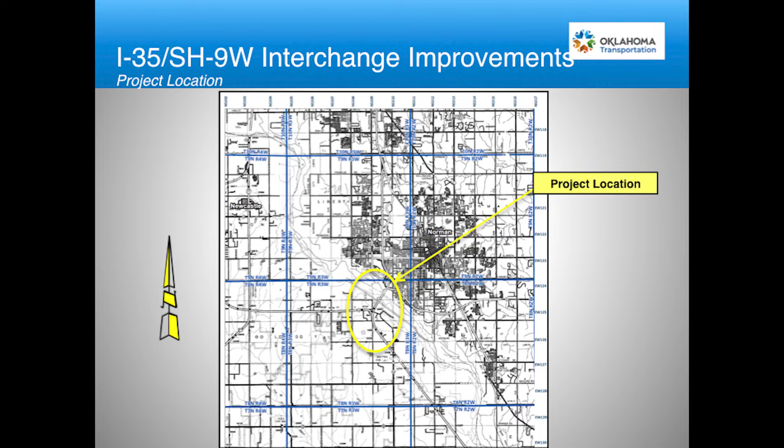Our existing State Highway 9 project goes over I-35, which has 4 lanes currently through on the north side of the State Highway 9 bridge. Our typical section consists of a 30-foot wide paved median with concrete barrier, 10-foot inside and outside shoulders to supplement those 4 lanes of travelway. A little further north towards the bridge, there are additional lanes that come into play, which we will utilize in all of the design alternatives we're going to show this evening.

South of the State Highway 9 bridge, our typical section changes a little in that we have a 30-foot wide grass median with cable barrier, a 4-foot inside shoulder, and a 10-foot outside shoulder.

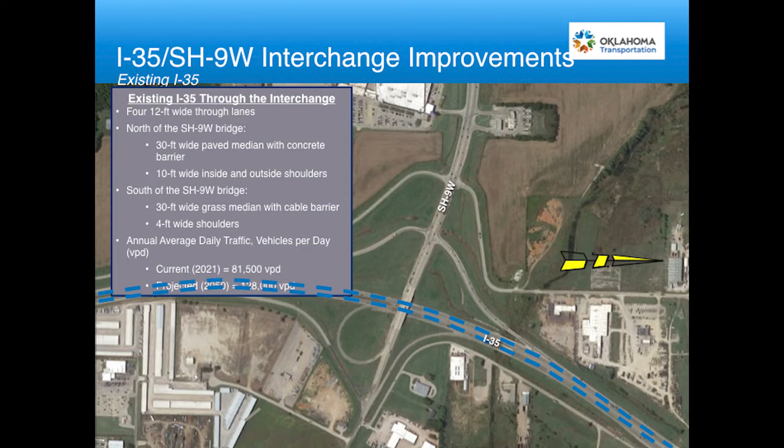The average daily traffic through this area on I-35 currently is about 81,500 vehicles, and we're projecting that to go up to about 128,000 vehicles a day.

On State Highway 9, currently we have 4 lanes of travelway on an 80-foot wide bridge. We've incorporated a few turn lanes, left turn bays, and some right turn lanes. It also has two 10-foot wide shoulders on both sides. Current traffic on State Highway 9 over I-35 is 34,690 vehicles per day, and we're projecting that to accelerate to 58,900 vehicles a day by 2050.

Our existing interchange as it sits today is a partial cloverleaf. On the west of I-35, we have diamond ramps with southbound travelway exiting to State Highway 9, and State Highway 9 traffic entering onto southbound I-35. In the southeast quadrant, we have a loop that goes eastbound to northbound I-35, and a northbound exit ramp that exits to State Highway 9, where you can go east or west. In the northeast quadrant, we have free flow for westbound traffic traveling on State Highway 9 going northbound on I-35.

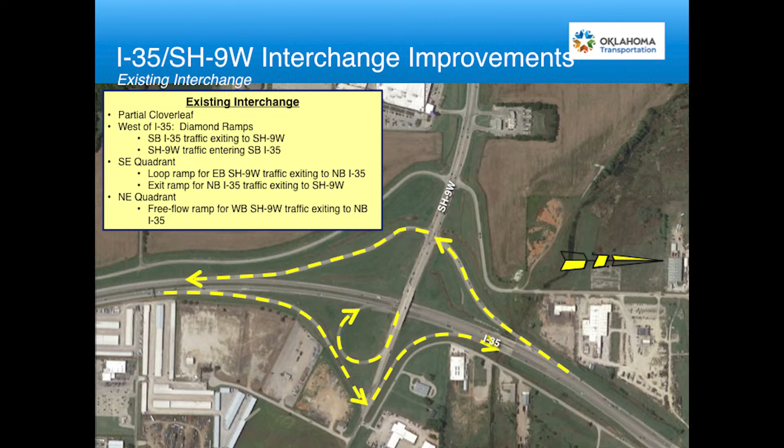What's the purpose of this project? The purpose is to address increases in traffic volumes and localized congestion by reconstructing the interchange to improve operations.

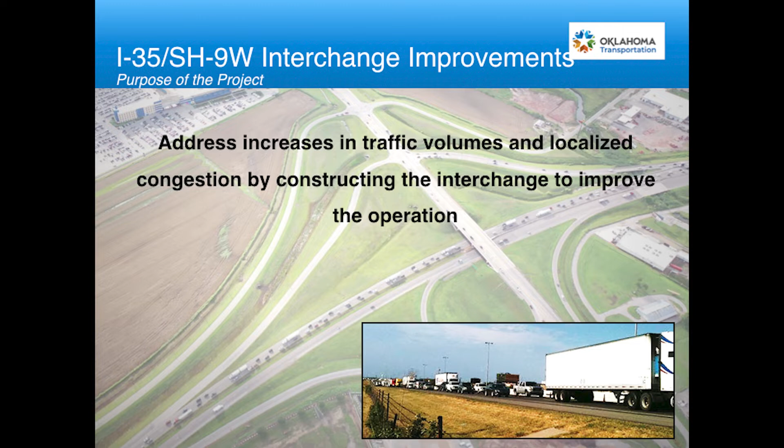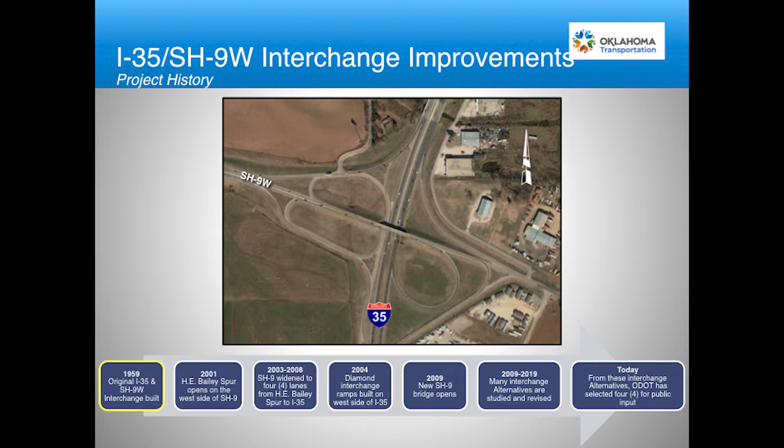Some project history: the existing interchange was constructed in 1959, and it served its purpose well until we started seeing economic development and the traffic generators that came with it. Back in 2001, the H.E. Bailey Spur, connecting State Highway 9 West to I-35, was constructed by OTA, and that was around the time I began working closely in this corridor.

I became the District 3 construction engineer in 2001, so I worked on just about all of the projects we'll discuss that followed this construction.

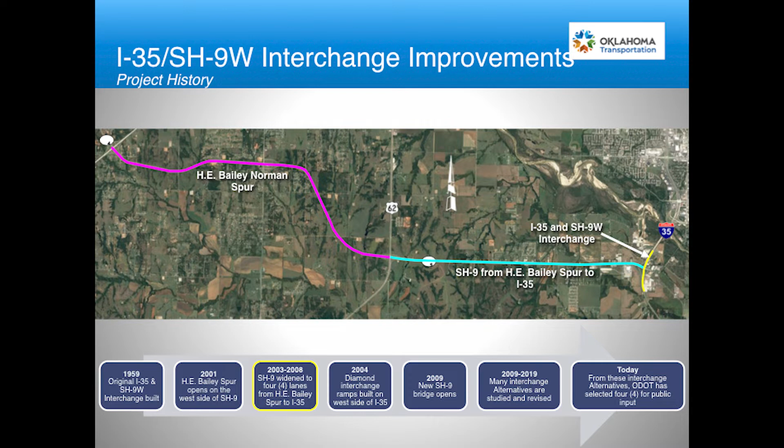Around 2001 we started planning, and from 2003 to 2008 ODOT had to play a bit of catch-up, developing and constructing the widening of State Highway 9 to 4 lanes from H.E. Bailey to connect to I-35 and reach this interchange we're discussing tonight.

Around 2004, we recognized that the existing interchange, constructed in 1959, needed some modifications, particularly on the west side. We redid the loop ramps and put in diamond interchanges on the west side. We also realigned South Harvey Avenue, also known as 12th Avenue or the West Frontage Road.

In 2009, in this corridor, one of the worst features I had to deal with, the thing that kept us up at night, was the State Highway 9 bridge. Prior to 2009, it was our worst bridge in the district, the absolute problem child from a structurally deficient standpoint. So it was time to work on that.

So we had a program in place, and we replaced the State Highway 9 bridge to its current state, the 80-foot wide bridge I mentioned earlier. We also did some work on the ramp, adding a second lane to improve free-flow efficiency, and modified the signalization at that time, around 2009.

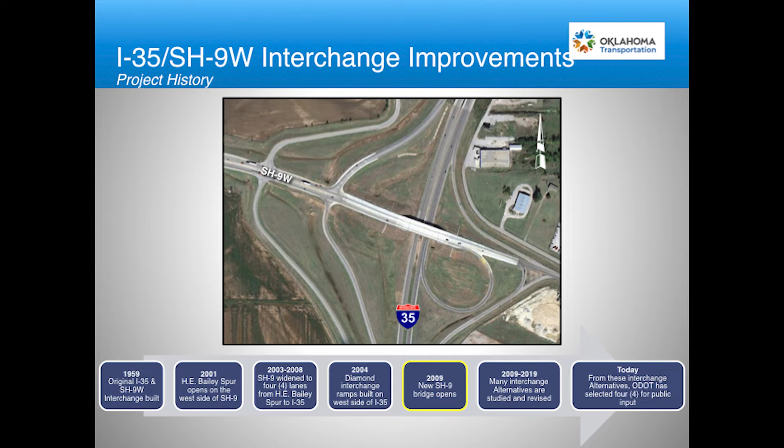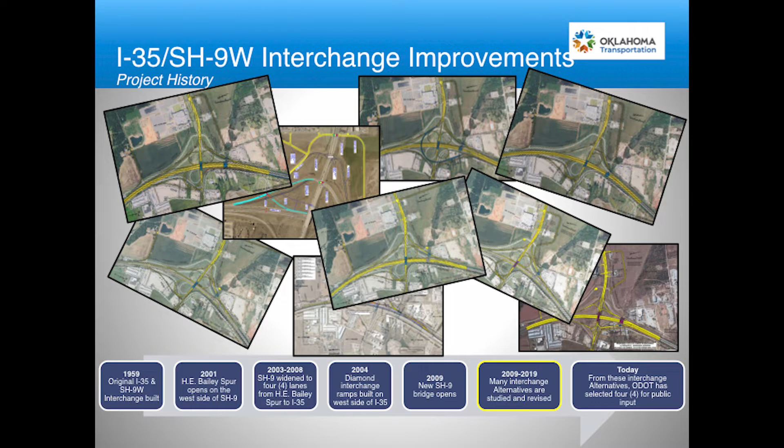Then the real work began, and we started programming and planning for an interchange at this junction. From that point on to 2019, we've had all kinds of ideas in our heads. A lot of iterations, a lot of collaborations, and a lot of talk, mainly with some of our engineering partners in the consulting world, a lot in-house.

Brings us to this meeting today, where through all of what I've just shown on the last slide, we're confident, with a high degree of confidence, that any of these 4 alternatives we're going to present tonight are solutions to our interchange at I-35 and State Highway 9 West. We've labeled them through the iterations we came to as alternate 2A, alternate 2B, alternate 3D, and alternate 4. I'll explain them in detail here in a minute.

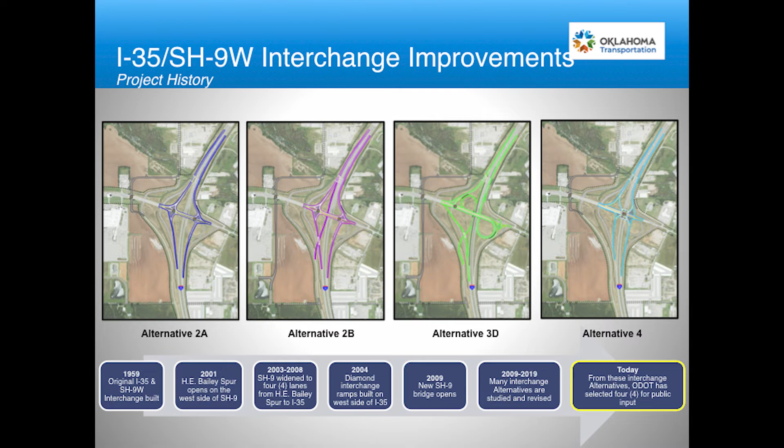Alternate 2A is a divergent diamond interchange, relatively new to our state. DDIs are used in other states. We do have a functioning DDI today, I believe at I-40 and State Highway 6 at Elk City. So this DDI, if chosen by you and I as a group, would be the second one in the state.

What's unique about a DDI? Some of the key features specifically for this project: this DDI, as we've configured it, increases the existing signal spacing through a partial realignment of South Harvey Avenue. It also realigns the West Frontage Road a little bit.

Other key features of this divergent diamond is that both directions of traffic will cross over to opposite sides of the bridge crossing I-35, i.e. they will diverge to the total opposite side that we are used to, creating some efficiencies of interchange. Interchanges of this detail are able to really handle high volumes of traffic, and I'll go into that in a little more detail here in a minute.

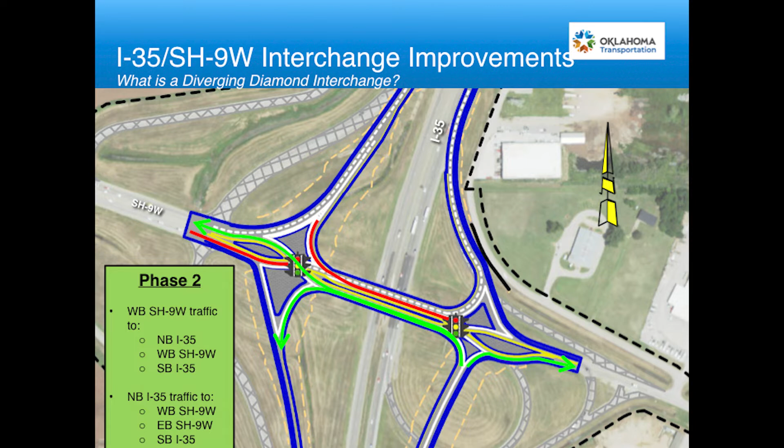Divergent diamond interchange, what is that? It's an interchange in which two directions of traffic on the non-freeway side cross to the opposite side of the road on both sides of the bridge, i.e. they diverge on the opposite side of the traffic.

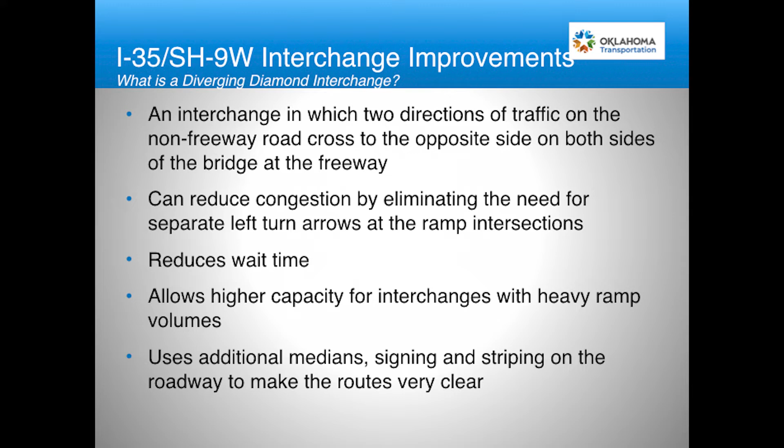One thing from the previous slide: divergent diamonds have an acronym. I'm not a big acronym person, but you'll often hear them referred to as DDIs. DDIs can reduce congestion by eliminating the need for separate left turn arrows at the ramps. DDIs reduce the wait time. Divergent diamond interchanges can carry higher capacities for interchanges with heavy ramp volumes, and DDIs do that by using additional medians, additional signing and striping on the roadway to make the routes very clear.

But all other features shown in the other DDI are exactly the same when it comes to the ability to carry very large volumes of traffic that we're projecting in the future, and definitely handle the existing traffic.

Alternative 3D is what we're calling a loop interchange with reliever ramp as well. Some key features: again, all of these options increase signal spacing through full or partial realignment of South Harvey Avenue.

It also reconnects the frontage road, similar to option 2B, because of the reliever ramp we've been able to create. It also becomes a one-way from this point, restoring connectivity to our county road system, or 12th Avenue, back up over and around.

In this option, additional key features: eastbound State Highway 9 West travels through northbound through the loop. So that's on this loop right here going northbound - eastbound traffic traveling to northbound. It creates the reliever ramp we talked about.

It also creates a loop west of I-35 that directs westbound State Highway 9 to the west frontage road. So that's this westbound travel going through the loop to the westbound frontage road. This is also the westbound travel route to go to southbound I-35.

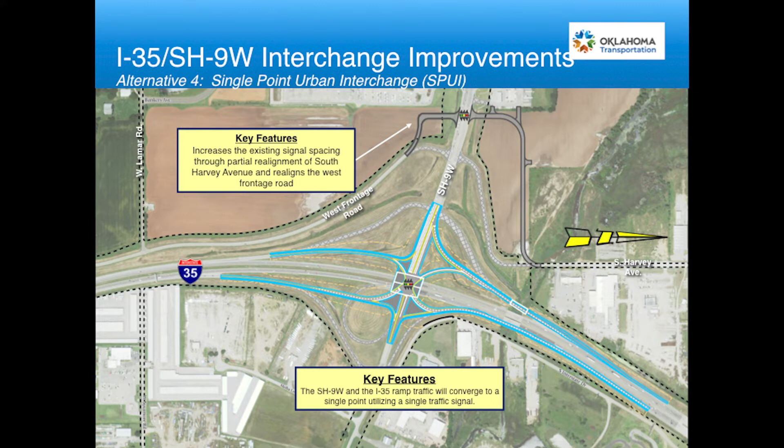The main key feature of the SPUI is that it has a very compact yet large footprint that can handle very large volumes of traffic with high ramp traffic.

And the main feature, because it's called a SPUI, is that it takes every direction of just about all of the movements, not all of them, but most of them, through a single traffic signal system. It's a huge monopole with several signal heads on it, but they all go through one point. About 80% of the movements go through that.

In the signal phasing for a SPUI, there are really about 3 main phases through it.

With the stop conditions for the SPUI, you could have a scenario where you have I-35 traffic going northbound to westbound - that's this movement here. You can have southbound to eastbound on Highway 9. You can have State Highway 9 traffic going westbound to northbound, and also westbound to southbound and eastbound to northbound.

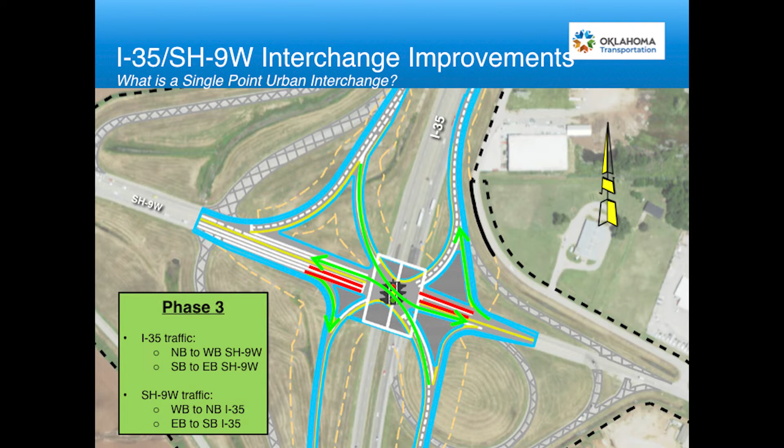What's a single point urban interchange? It's an interchange with a single signalized intersection in the center of the bridge, able to accommodate most of the movements through that single traffic signal. SPUIs can accommodate higher turning capacities and can handle large vehicles such as trucks, which can easily navigate through wide turns.

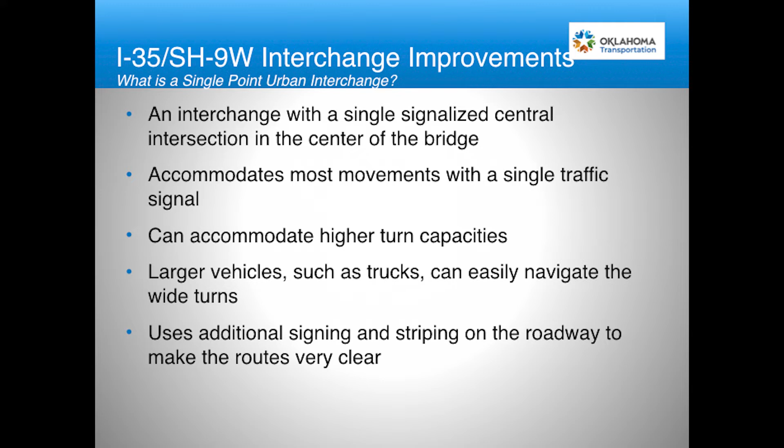SPUIs also use additional signing and striping on the roadway to make their routes very clear. We put together a measure of effectiveness, and again, nothing on here, even the red, is meant to imply that any of these interchanges won't work. We are absolutely confident that any of the four alternatives we've talked about will work in this interchange.

What we've put together is a comparison between one another as it relates to delays, average speeds through this interchange, the average travel time going through it, how many vehicles are in our throughput through our models and engineering data, and the average number of stops.

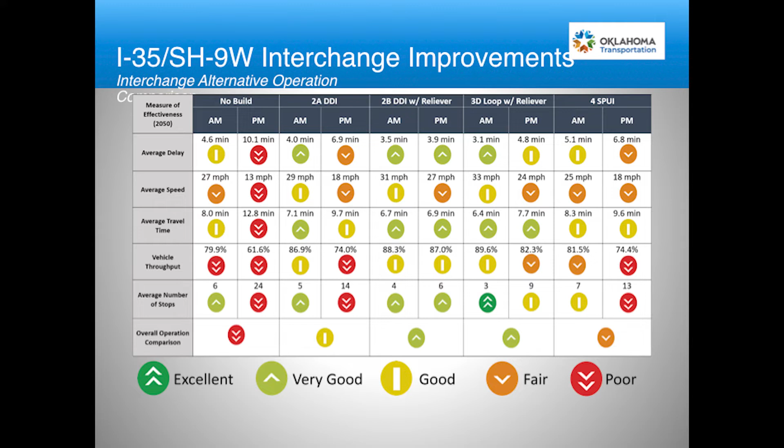You can see if we do nothing, the existing compares itself to each of the options, not in an effort to sway anyone. That's what the data is telling us - relative to one another, this is what we see, from a good, very good, to excellent, to poor status.

Now I'll turn it over to Melissa.

For this particular project, the impacts they saw were Canadian River habitat impacts that may occur, so best management practices and sediment control would be required. There's also potential impact to whooping crane habitat, so construction would avoid the migratory bird nesting season, through seasonal construction or netting of structures to prevent birds from nesting. Additionally, there are some off-site cultural resource sites that will be avoided during construction.

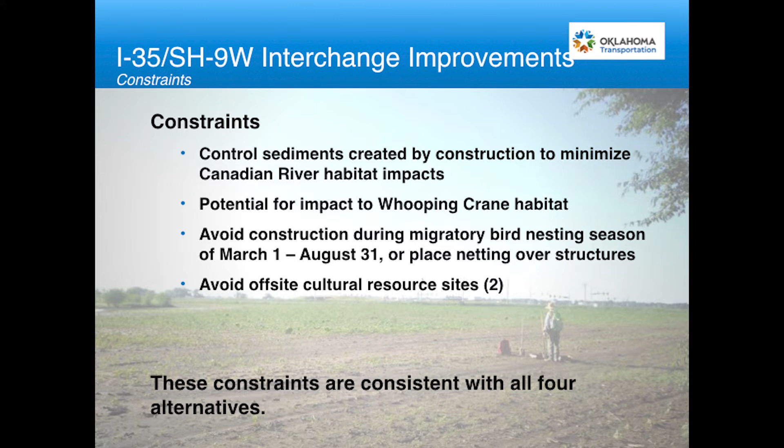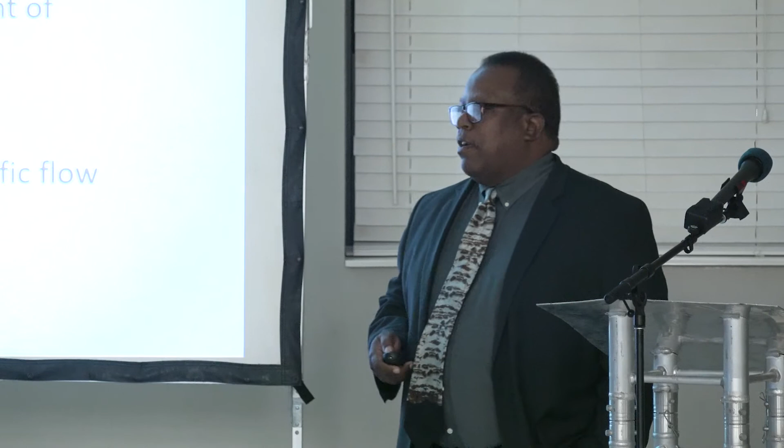I want to make a minor correction - the impacts are similar, they're not the same. They have similar right-of-way and environmental constraints, and there'll be similar utility impacts, but they're not identical. Some of the alternatives have longer frontage road work and bridge work, et cetera. But we absolutely believe that they're consistent and similar in impact.

We also believe that all four - is this the environmental screen? I'm sorry. What do we see in all four of our alternatives? All of our alternatives improve our traffic operations at the interchange for I-35 and Highway 9 West.

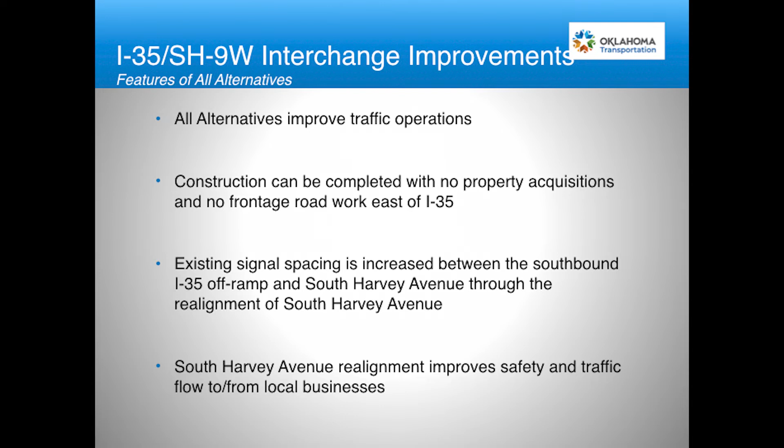All four alternatives we've shown this evening, we believe construction can be completed with no property acquisitions and no frontage road work east of I-35. We believe that in these alternatives, the existing signal space is going to be increased between the southbound I-35 ramp and South Harvey Avenue through the realignment to help improve operations. All of the South Harvey Avenue realignments improve traffic flow to and from our local businesses.

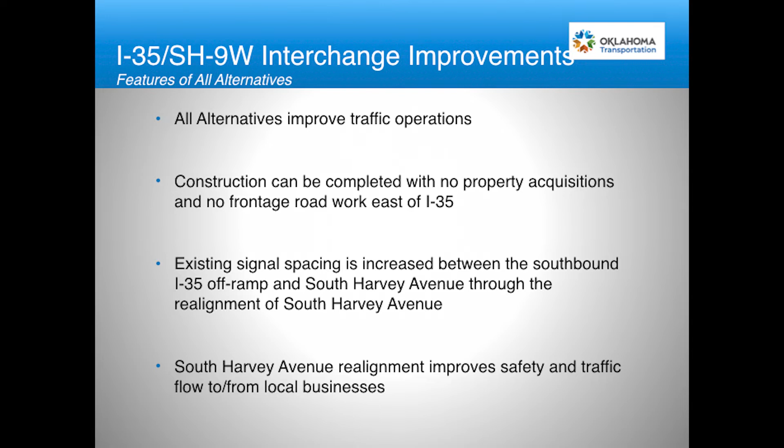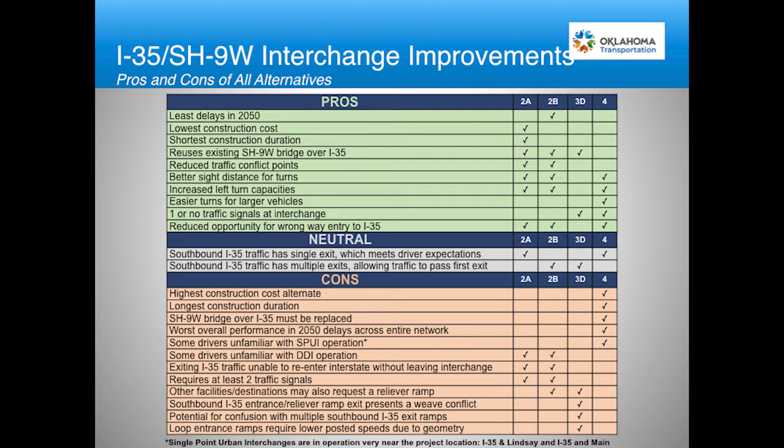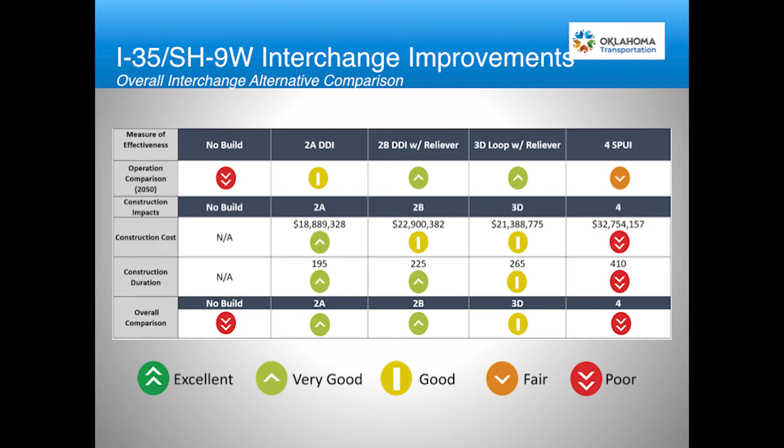Go ahead, Melissa. I'll turn it back over to Melissa. So we've said it several times, I think each of us have said it, but we'll say it again: it is very important to ODOT to hear everybody's comment, to know your concerns. So we mentioned there's several different ways to do that, and I'm going to go through those so you know what you can do.

First, you can leave your comments with us tonight. Back there on the right in that blue box is what we call our comment box. In your pamphlet there is a comment form, and there's also more on the table. If you need a pen, let us know. You can fill that out tonight and leave it there in that box, and we'll take it with us tonight.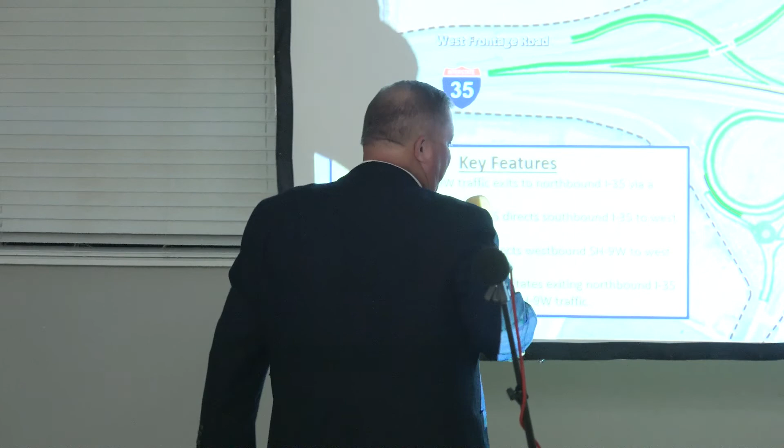So a couple of things. The beauty of the DDI is that for that movement, you only have to go through one traffic signal. If you're going east coming from the west, and going north on 35, you're going to go through one traffic signal. You're going to be shifted to the opposite side of the road, and then you're going to have a free left. The DDI allows you a free left, and it also allows you a free right on the off ramp. So the beauty of it is that you only have to go through one traffic signal.

The SPUI, again, one traffic signal. So in this location, if you're coming from this direction, you go through one traffic signal, hit this, and make this movement. If you're on the loop, you have a direct loop around. That would be the loop option. On this, you still have one traffic signal to go through. You hit this loop, a dual lane loop going north, and we'll have our own lanes of sufficient length before merging into I-35. Then the SPUI, again, you go through one deal.

So a SPUI, I'm using acronyms again - let's say Morgan Road on I-40 and Lindsay on 35, that's what a SPUI is. A DDI, again, is a diverging diamond. We have one in Elk City. Ron is building one, very aggressive time frame because that's what we promised - we'll start construction in calendar year 23. We're building one at Waterloo in 35, and one in Tulsa at 81st and 75. Just a great option to handle a lot of volume.

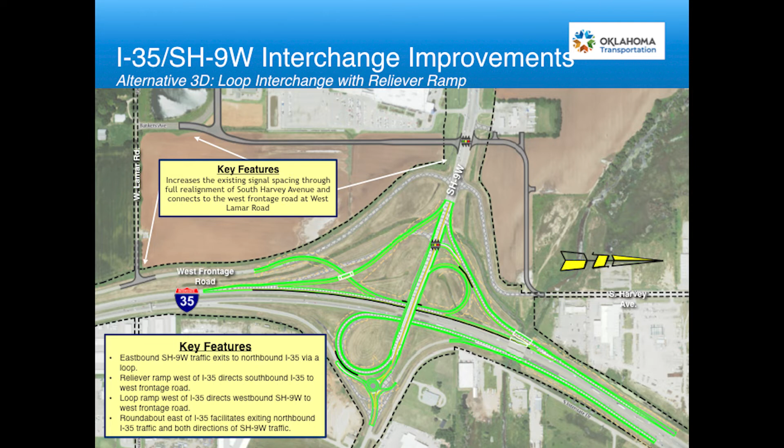So like this afternoon, I don't know what time you guys came home, but I came home at 5:30 and it was backed up all the way, looped around Lindsay Street. So that's another thing. I didn't know if that was even an option, to go behind, because at this point there will be no entrance off of Highway 9 into Love's, correct? You have to turn on Harvey to go into Love's and come in and out of Love's that way.

As it's currently drawn and proposed, it affects this drive below. One or both drives? One, just one drive. And to answer your question—

Again, I showed a plethora of alternatives that talked about what we have looked at from 2009 up into 2010. And during that study, some talk about realigning that portion of Harvey Road behind Love's may have been discussed, and was discussed. But my focus and my charge was reinvigorated to do what I have shown in my construction program for more than 8 or 9 years, which is to fix the interchange. And that's what I'm doing.

That's what we're doing as an agency. We have been refocused to deal with the 35,000 to 58,000 vehicles traveling west and east on 9 through the interchange, and dealing with the 81,000 to 128,000. So my charge is to fix the interchange.

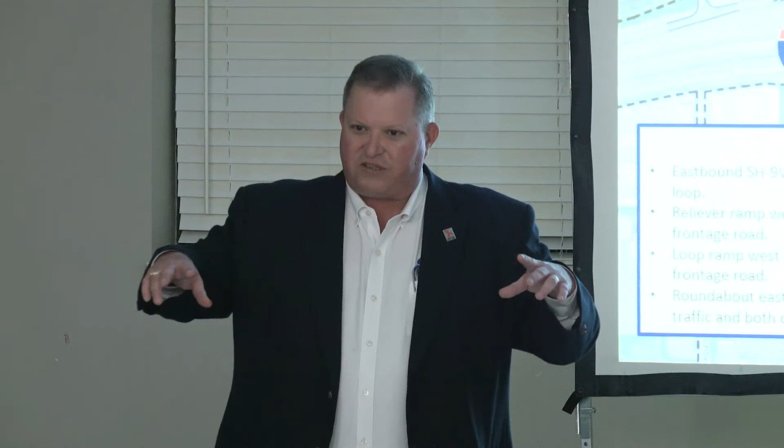A couple things about them: the roundabouts are designed for trucks, but we design them so trucks get out of the travel lane. The trailer tracking goes on what we call the apron. So we have the driving lane we want cars to stay in, but if the truck cab stays in the driving lane and you're a legal truck, the trailer will track up onto the apron. That apron is designed for trucks.

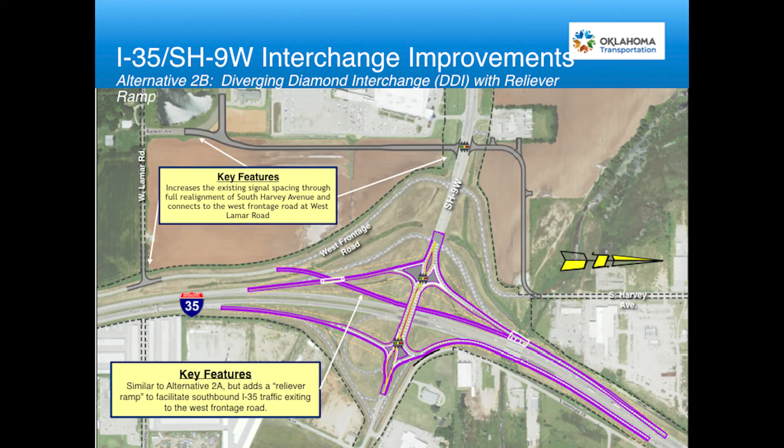I like all the options. You did good. But I live on 12th Street, 12th Avenue, about 2.5 miles to the south. And I grew up in Kansas, so I've only been here about 5 years, but I like roundabouts.

But I've always been confused at what I call the idiot stop sign at Lamar and 12th. Because 12th Street seems to me like it ought to be a through street, and they'd have a stop sign on Lamar, but everybody always has to stop. So what I'm interested in knowing is, you have the relief road coming off there, and if I'm coming north on 12th Street, now that will be a one-way street and I'm going to have to turn left. So is that a spot for a roundabout?

Great question, very very good question. So a couple things you need to know: when you bring this ramp off I-35, this becomes one way. That's the reason why you need this. So if you're going to have a one-way connection at this three-way intersection, the intersection is going to have to look a little different. One of the options we looked at and modeled was certainly a roundabout, and if you asked us what we prefer today, we think a roundabout at that intersection is what would work best.